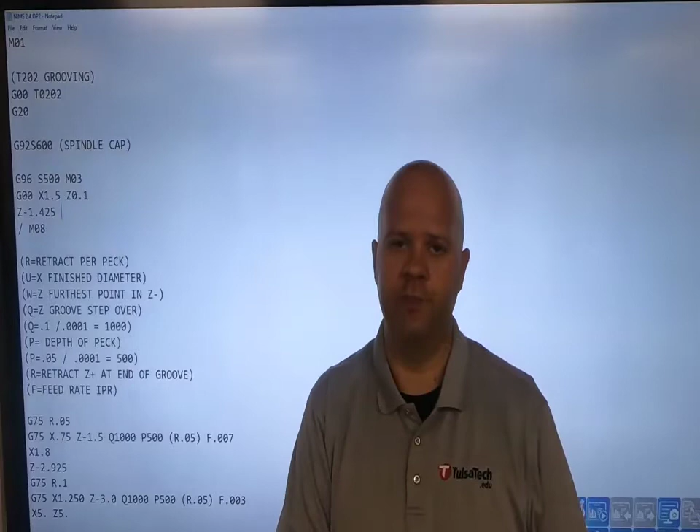Hi guys, I'm Aaron, and today what we're going to cover is two-line grooving canned cycles, okay? External grooves. This video won't be very long because most of the code is pretty simple. All we're going to do is go over a type 2. If you're already familiar with a single-line grooving canned cycle, there's not a lot of variance between the two, but I am going to show you what the differences are, okay?

So today we're going to be using our code here to make the grooves on this part right here. I've got two of these grooves. We're going to be doing this groove and this groove, okay? So the numbers we'll want to pay attention to are the lengths and then these diameters, okay?

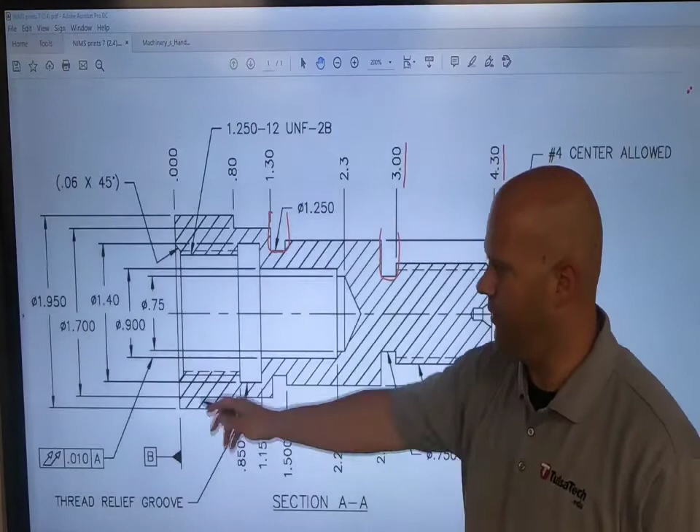This print's a little bit backwards because you'll have to take your overall length minus the distance from 0, because it is over here. So that together would be 1 inch 300 thousandths, okay? That tells us the distance between here and here. I'll let you guys figure that out a little bit later. However, all I want to do is just cover a little bit about how this works, okay? So we'll go back to our code and I'll show you what we're doing.

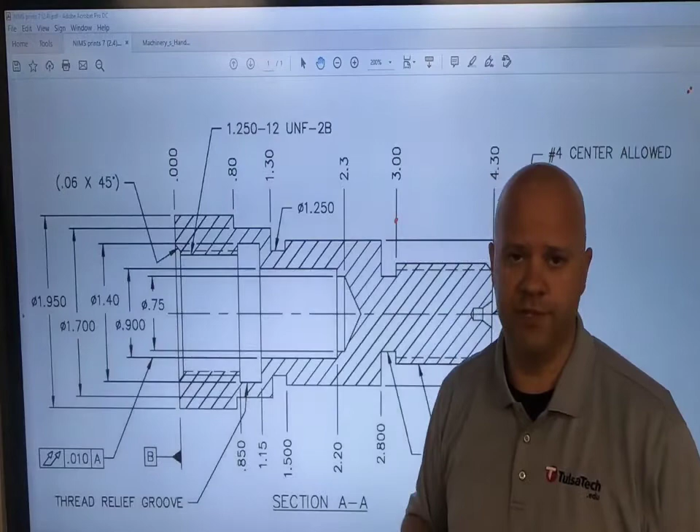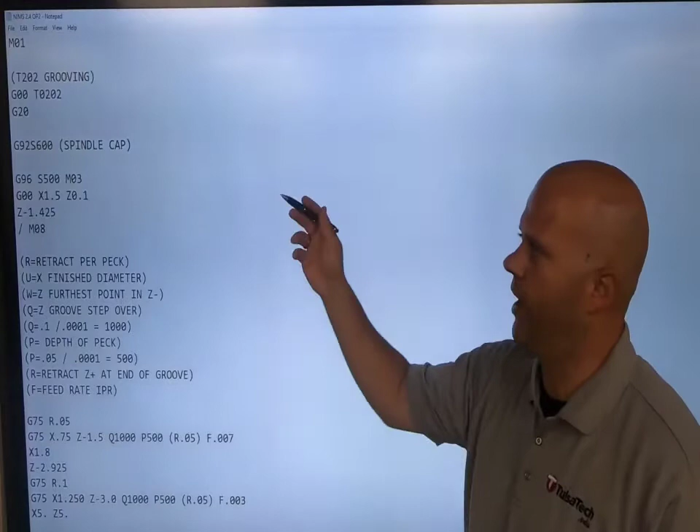So the first thing we're going to do is position ourselves right there, okay? We're actually going to position the side of our tool right there, and I'll show you why that's important. So we'll keep this here and switch back to our code. Okay, so first thing, in parentheses, this is going to be my tool 2 grooving. We're going to be using a Siemens control for running this program. So I'll point out a couple variables that need to be correct in order for it to run properly on your simulation and on your machine.

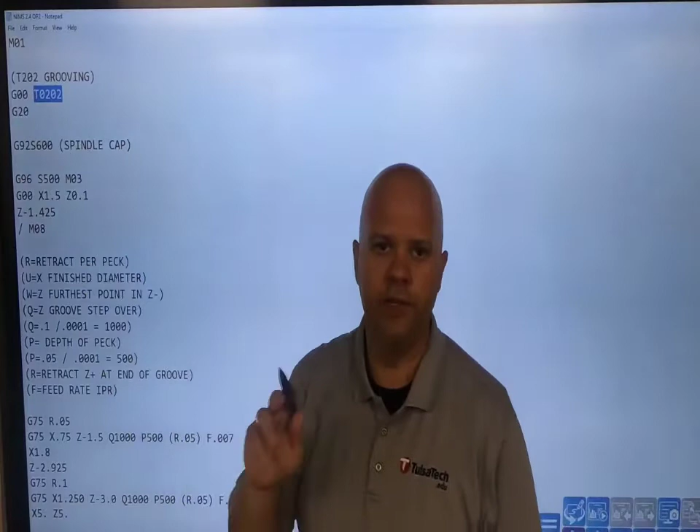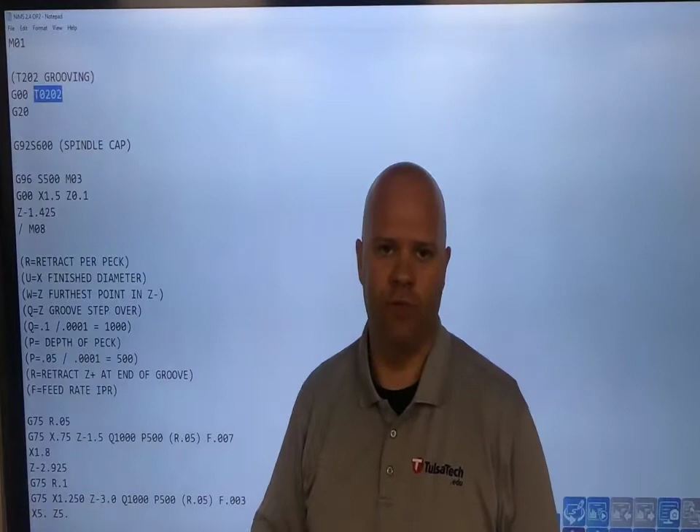So up here at the top, you'll notice I have a T0202. Now on most machines you just type in T202 and it will index to tool 2 and pick up the offsets. However, I need that additional 0 for the Siemens control machine because it helps with the machine's logic in picking it up correctly. Okay, so with that said, I've got my tool called up. I've got my spindle cap here.

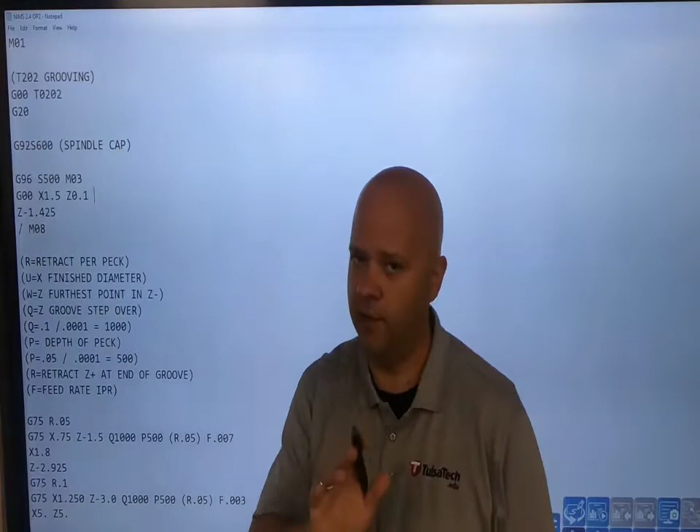Now my spindle cap is the same thing as a G50, but on the Siemens control it's going to be a G92. Exact same thing, just a different G code, okay? You'll run into that a lot on different style machines. Just something to get familiar with, all right? I've got my G96. I'm turning on my constant surface speed. I have moved in front of my part. Okay, I'm 1.5 inches above it.

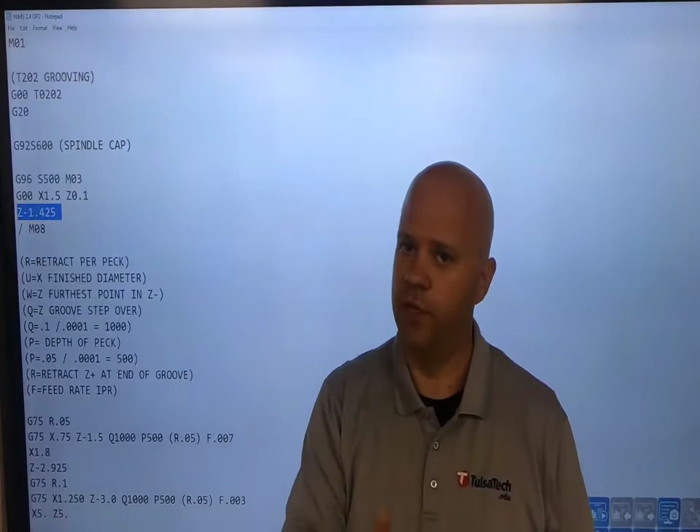And then I'm going to position myself, remember that clear plane that I was talking about? I'm going to position myself in Z, 1 inch 425 thousandths. But if you remember, I said the distance was only 1 inch 300 thousandths. So what gives, right? Why am I moving an additional 125 thousandths? The reason why is if I have an insert, see if I can draw this good enough. Okay, that'll be good enough.

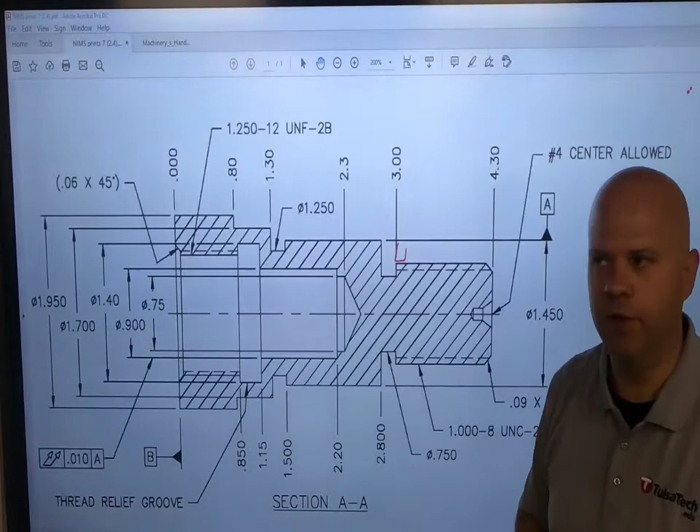So if I touch off my tool on the left side or the face of my part, okay, if I move 1 inch 300 thousandths, that puts my tool right there. But you can obviously tell from the imagery here, I would actually start grooving into my threads. So I'm going to do 1 inch 300 thousandths plus the width of my tool, which in this case is 125 thousandths. Now the right side of my tool is lined up with the left side of my groove. Okay.

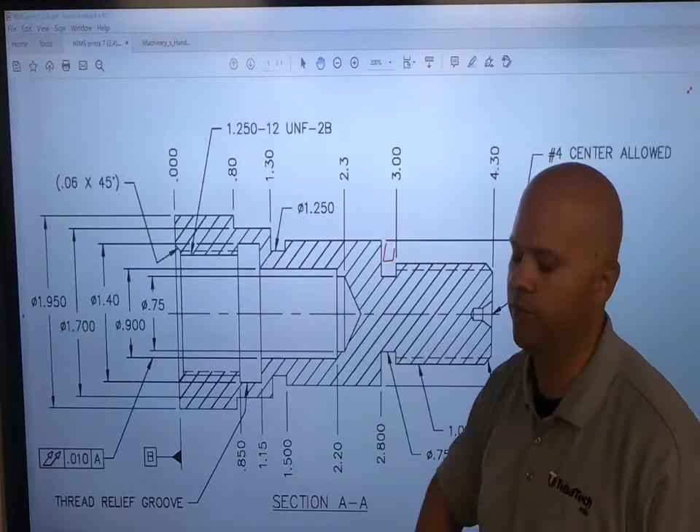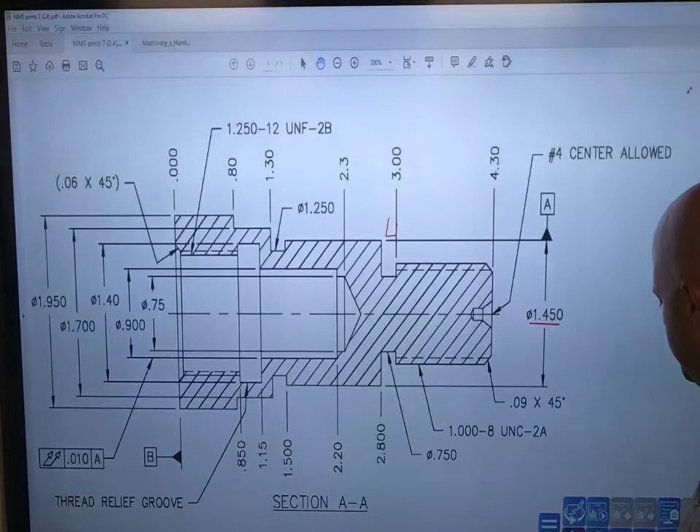That's why it's there. So let's go back to our code now that we have properly positioned my tool, and I'm actually a bit higher because I am above this surface. I'm at 1 inch 500 thousandths, which is 50 thousandths above that line. Okay, so we'll keep that on there, and then we will switch back. So I've moved to my correct position. Now I have in parentheses what everything means. If you come down here, you'll notice that I have a 2-line canned cycle for grooving, all right?

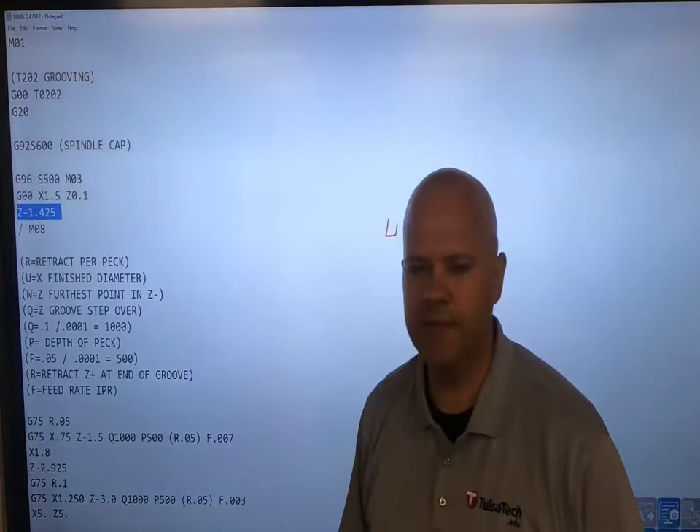So the first G75 that comes up has an R. All that line does is tell the machine the retract amount, okay? Retract per peck, because this is a grooving canned cycle, it's going to continue to go down into the groove. And if we're just going straight in and straight out, it's going to retract by the full amount. But if we're doing a pecking canned cycle, which is what we are doing, every time it goes down 100 thousandths, it retracts 50 thousandths.

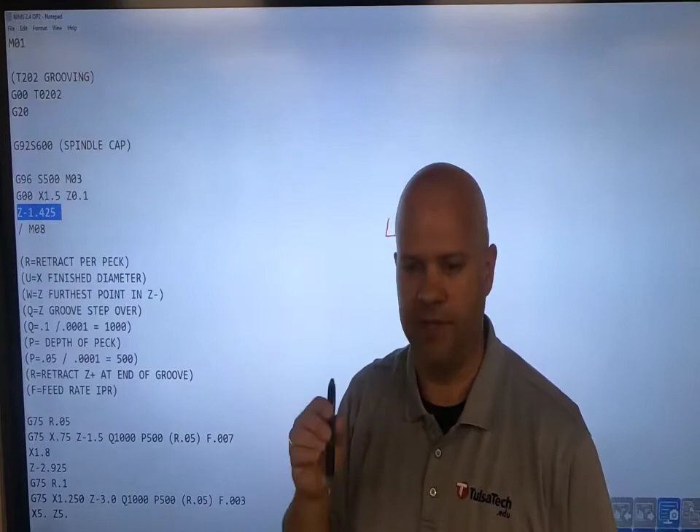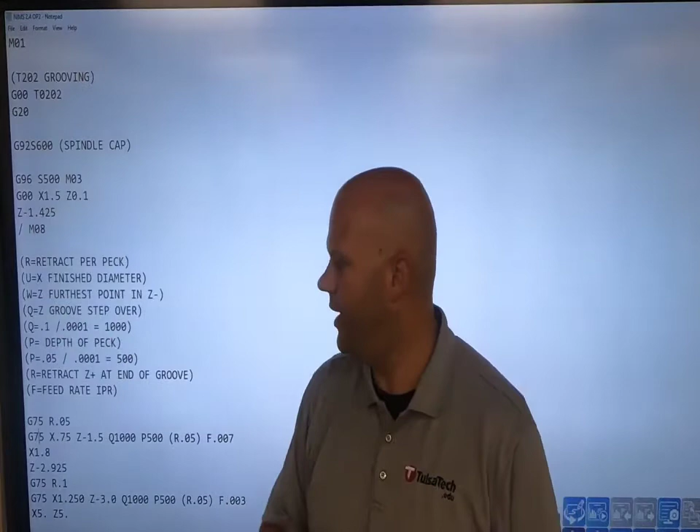Okay, so something to remember. The next line of code is pretty much just like a type 1 canned cycle. In fact, almost the whole line is, with some little variances. So what we'll talk about is the second line, which is our G75 again. My X is going to be the finished diameter. And if you'll see here, I have 750 thousandths, and that is because this diameter finishes at 750 thousandths.

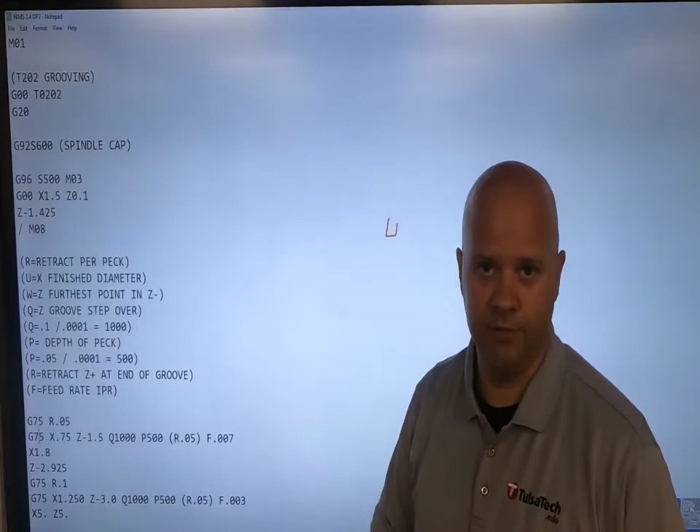Easy enough. Now my Z is going to be 1 inch 500 thousandths, okay? That is the furthest point in the Z negative. That's how far back I need that groove to go. So with that said, let's kind of show you what we're talking about. The groove starts here, but it ends right there, okay? It only moves 75 thousandths.

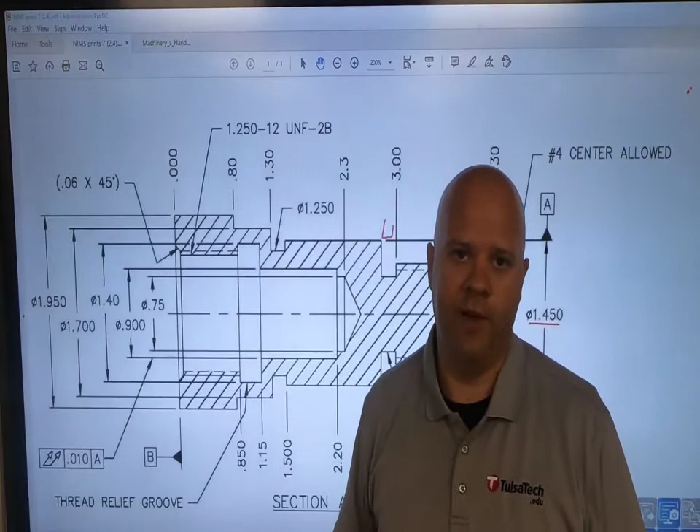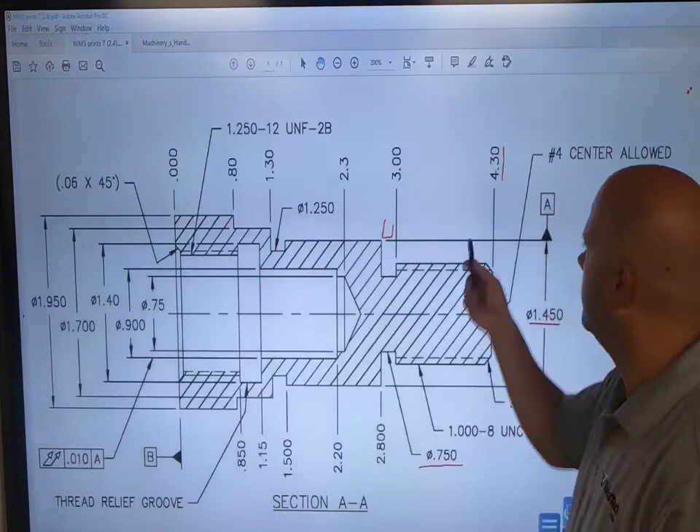So not very much. If you wanted to hand program it, it would be just fine, but these canned cycles help if you have wider grooves, or if you don't want to hand program it, one line of code does the trick. So all I did was I took my overall, and then I subtracted that from it, which in this case is 1 inch 500 thousandths. And that is what my Z is. That's as far back in Z as it goes. So we'll come back to our code.

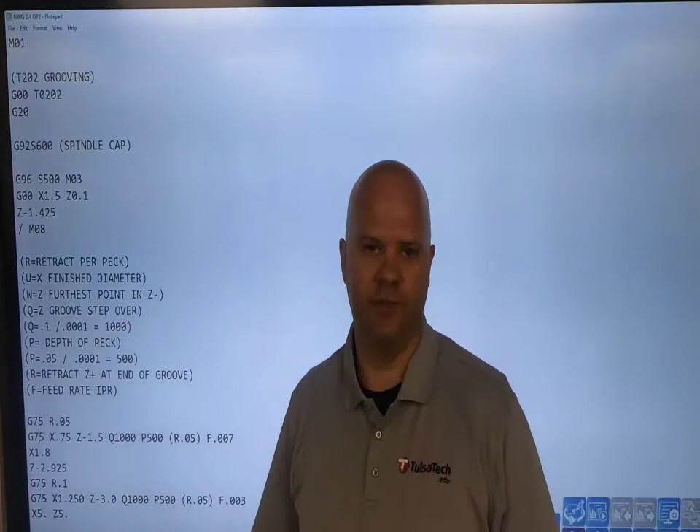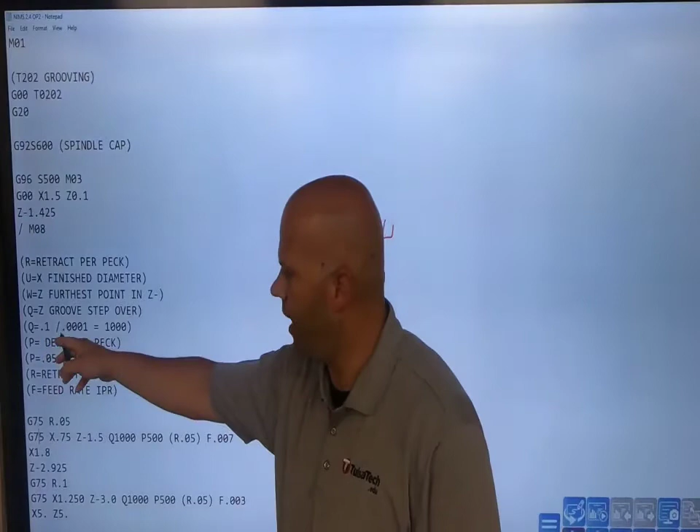And with that said, I have a Q, a P, and an F. Those are my final values. My Q is the groove step over. If you'll notice, it says 1,000. That's kind of weird, right? Well, this machine thinks in pulses. One pulse is 1/10,000 of an inch. So if I need to move over 100 thousandths, I take 100 thousandths divided by 1 pulse, which equals 1,000. And it doesn't matter, it's whatever step over you want.

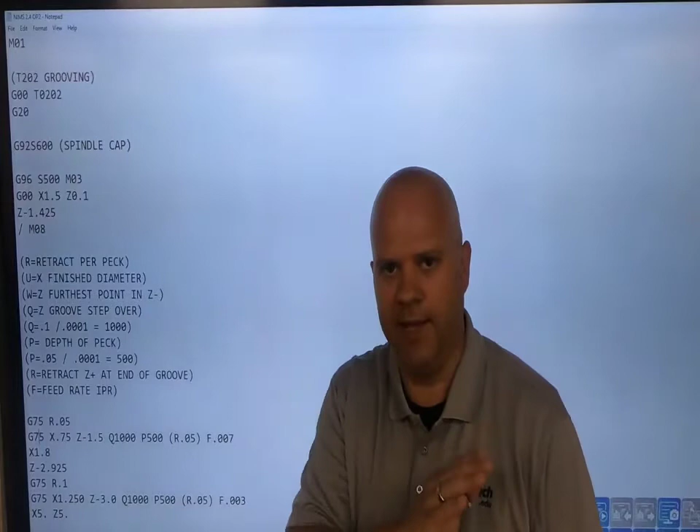I'm using an 1/8 inch grooving tool, so I'm going to move over about 80% of the tool. That way my tool stays nice and rigid, but I'm not leaving any excess material behind me. The next thing is the P. Remember I told you that I'm going to peck so much and then retract. Well, here's where that peck goes. Again, the P is in pulses. 1 pulse equals 1/10,000 of an inch. So if I want to peck 50 thousandths at a time, the P has to be 500.

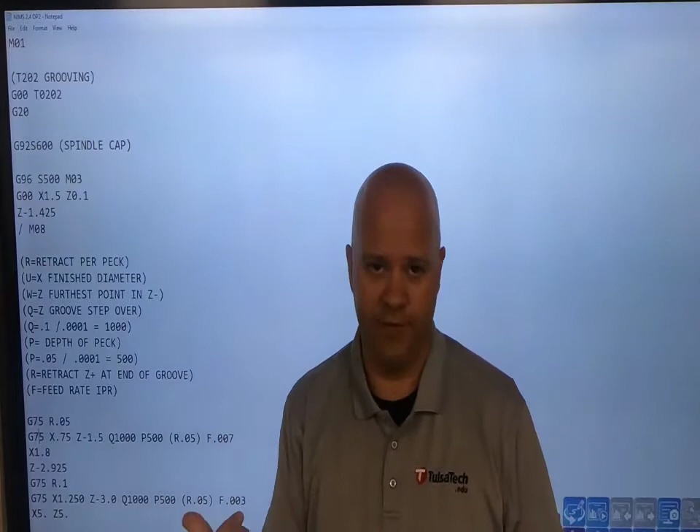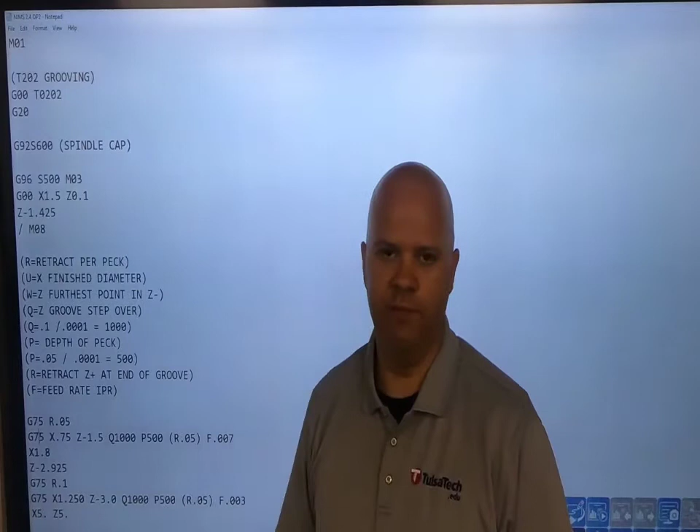And then of course I have my feed rate. For grooving, you've got to remember, we're putting a lot of downward pressure on a tool that's sticking out of a spindle. So if I get too aggressive, I risk actually pushing my tool out of the spindle. So I want to keep my feed rate simple. I'm actually going close to a finishing feed rate, which is about 7. So 5 to 7 would be just fine. 12 to 15, like on the other roughing canned cycles we do, might be a bit excessive. It just depends on how big your machine is and what kind of support you have.

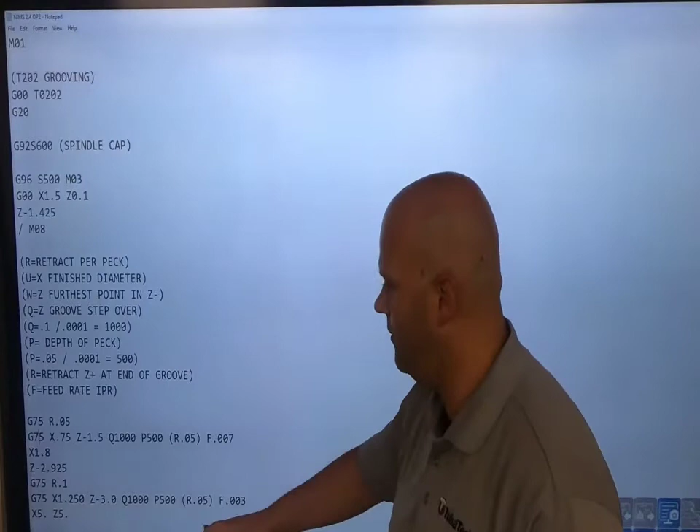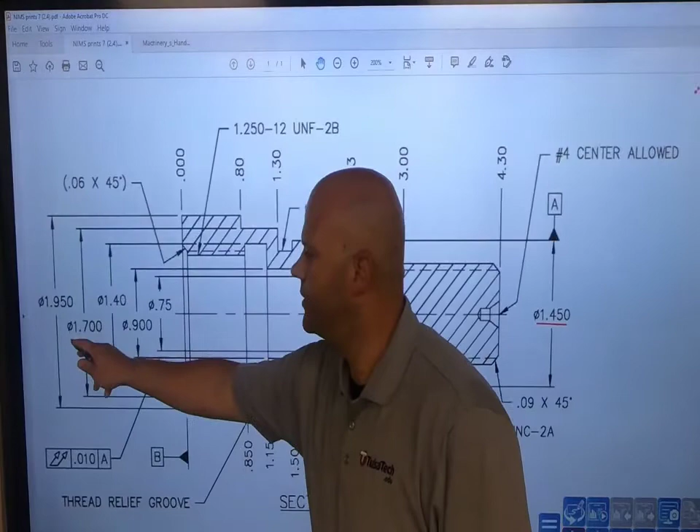So with that said, that canned cycle's all done. I have successfully done this groove. So what happens now is, make sure I get rid of that, I'm going to position myself to do this groove. If you'll notice, this is 1 inch 700 thousandths. So I need to be higher than 1 inch 700 thousandths before I move my tool over here. So I have to come up and then move over.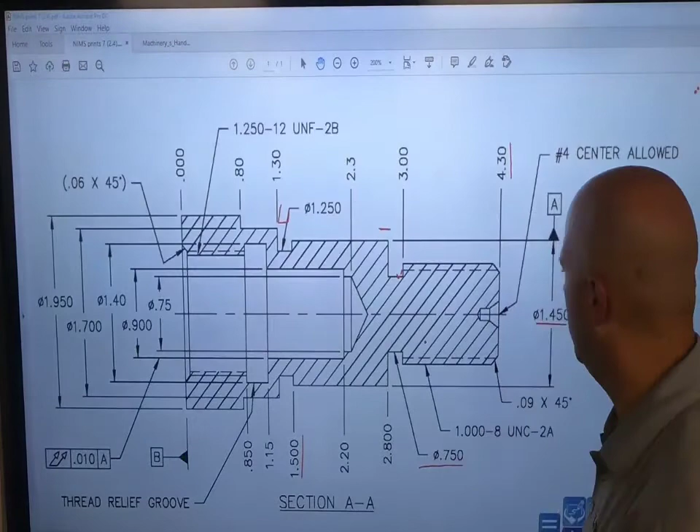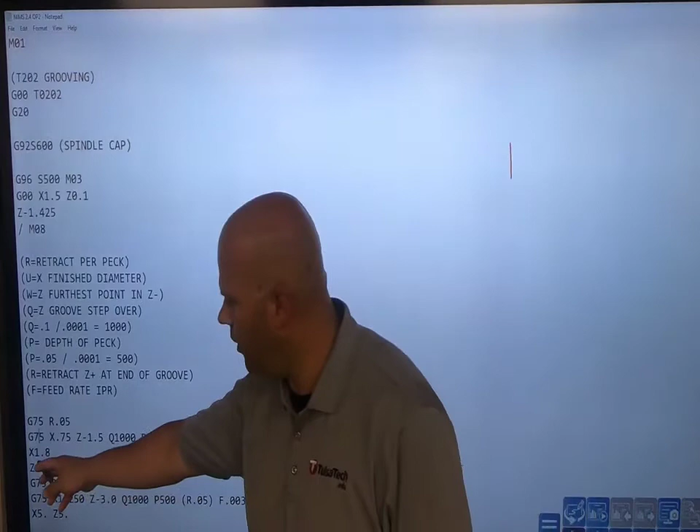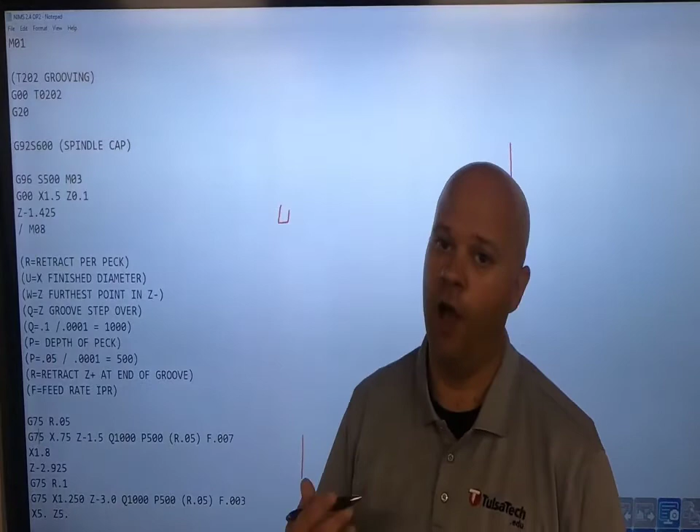Now again, I'm going to be going from here to there, and that difference is what my Z position will be. So I've come up to 1 inch 800 thousandths and I moved back 2 inches 925 thousandths. Normally it'd just be 2 inches 800 thousandths, but in this case I have to add 125 thousandths for my tool. With that said, all I have to do is type in my G75 again, and then it will do that groove at that location right there.

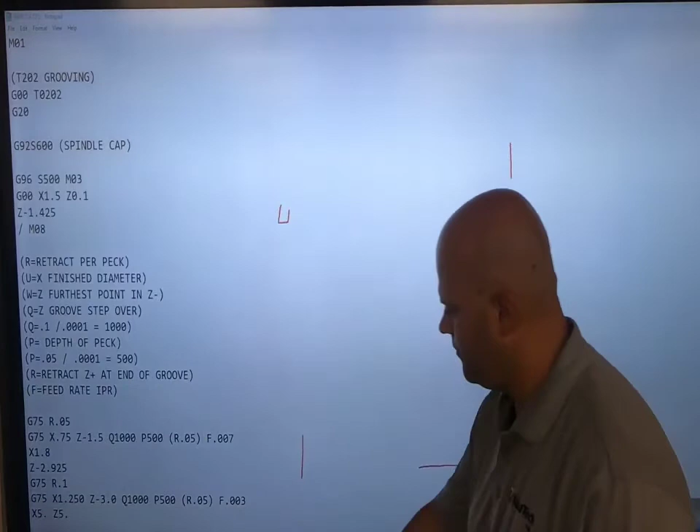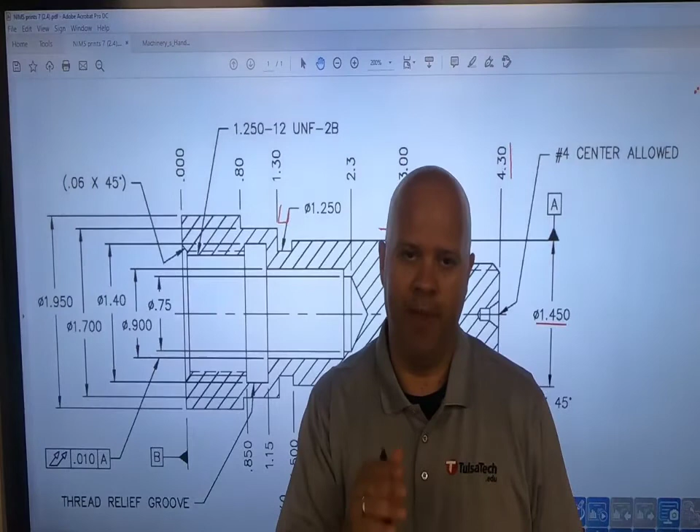So I go back to my part, and I can see, there it goes. So I've done my first groove and my second groove. Using that 2-line canned cycle for grooving, that's all you have to do. It makes it really easy. And remember, G75s also work if you're parting off, if you want to just take small pecks at a time so that the chip can break off the tool or the part.